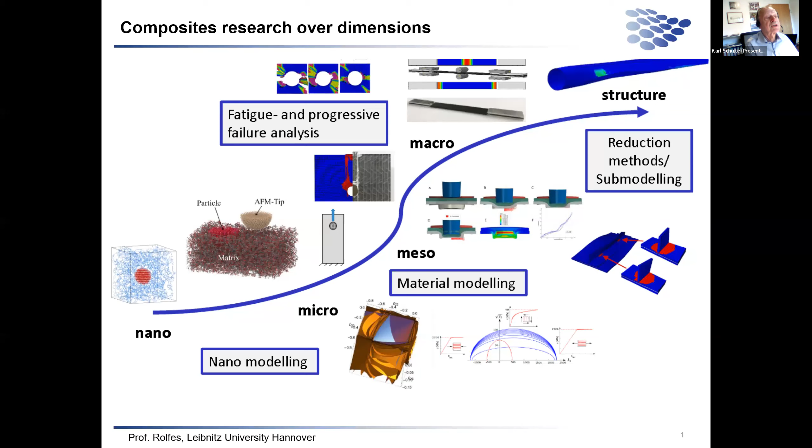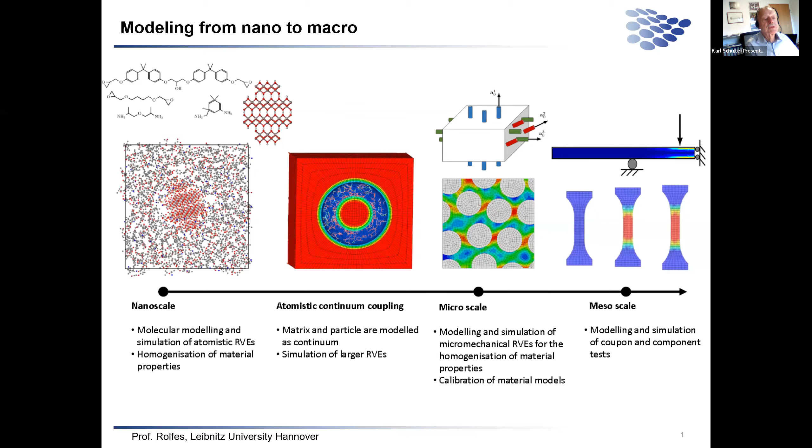So when we want to understand the material in modern design, we need to model the material. We have made quite some progress in modeling, starting from the interaction between, for instance, the nanomaterial with the matrix, shown on the left-hand side, then atomistic continuum coupling models. We go into the micro scale and mesoscale with the coupons, and further into the large structure, as you see here an example of a wind turbine blade. That means we go from the nano to the macro level for understanding and description.

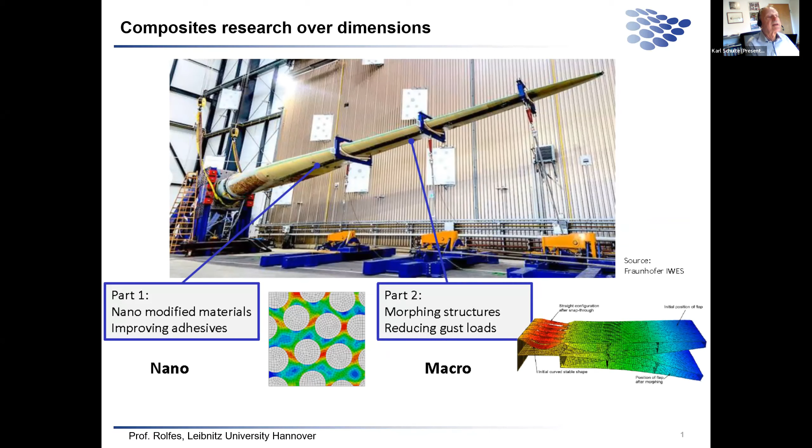Now I want to go a bit into some results of what's going on. You see here an example on the left-hand side where we see the fibers and the matrix, the gray part, and inside schematically carbon nanotubes, or for instance graphene or graphene oxide, as you can see here as well.

We have our fibers, our carbon fibers, and to understand the material properties, we need to understand the material entirely. We need to know how a carbon fiber is structured, what the properties are, the tensile and compression properties. But if we have nanofillers, we have to know also the properties of the nanofillers, and the interaction between the matrix, the polymer, and the nanofillers or the part.

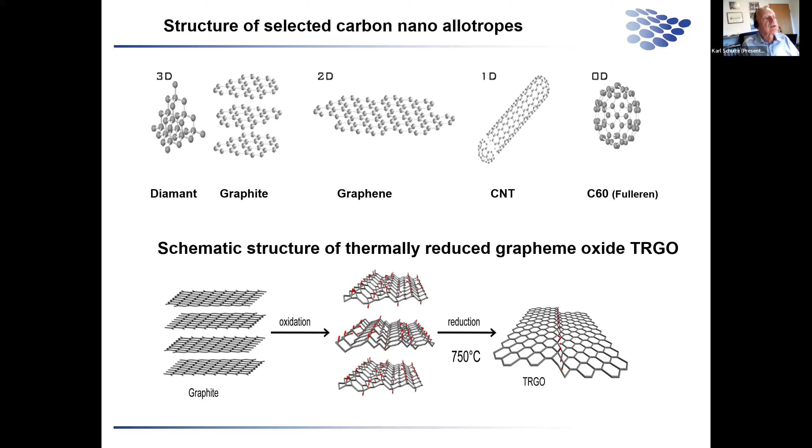So I will talk about nanofillers - I will use graphene or carbon nanotube, and to a larger extent, reduced graphene oxide, so thermally reduced graphene oxide. That is a material we can put into the matrix. I will further talk about a three-dimensionally structured graphite, which we call aerographite. This is a hierarchical carbon nanomaterial formed in a three-dimensional network, which is interconnected and extremely light in weight. If we have more time, I will talk a little more about this at the very end.

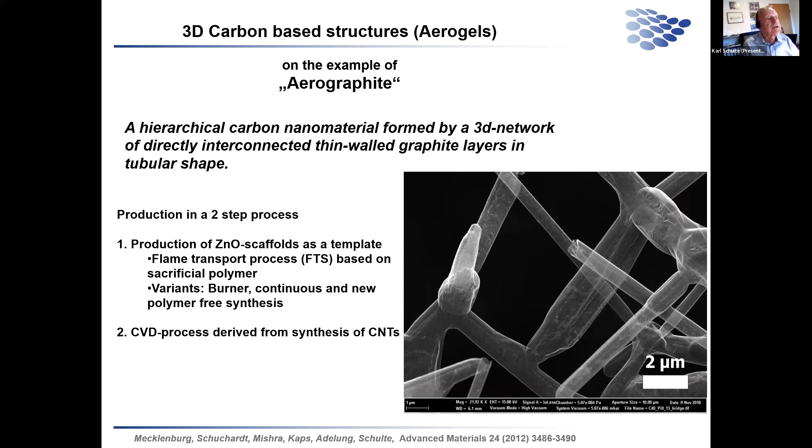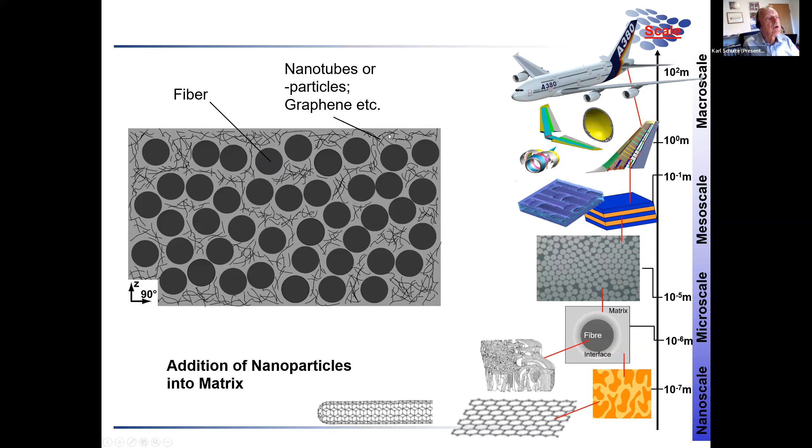Going back to carbon material, first I will talk about just the matrix filled with carbon nanotubes or graphene oxide. An important point is the damage behavior in a composite material. Fiber reinforced composites, if overloaded, might lead to matrix failure - a crack in the matrix, probably a crack between fibers. If we use carbon nanotubes as a filler in the matrix, as shown here...

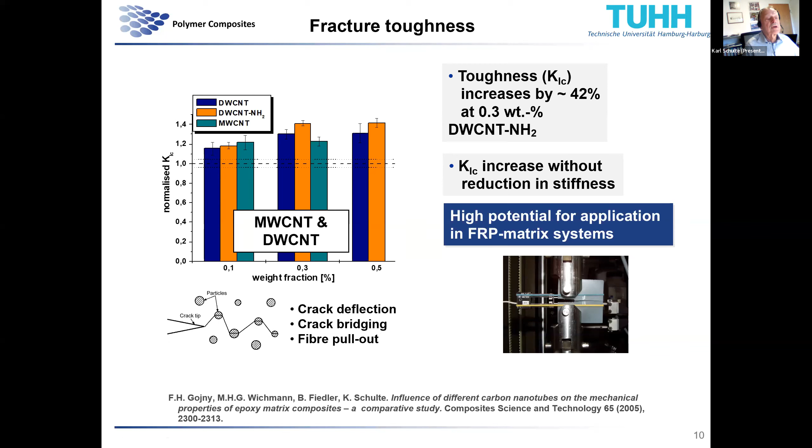We know from a test where we use a neat matrix and add only a very small amount, just 0.3%, of carbon nanotubes - there can be different types of it, I'll show that later - that we see an increase of a certain amount in the fracture toughness of the matrix. This increase in fracture toughness is due to mechanisms at the crack tip: crack deflection, crack bridging, or in the case of carbon nanotubes, pull-out of the nanofibers from the matrix. That results in this increase in fracture toughness.

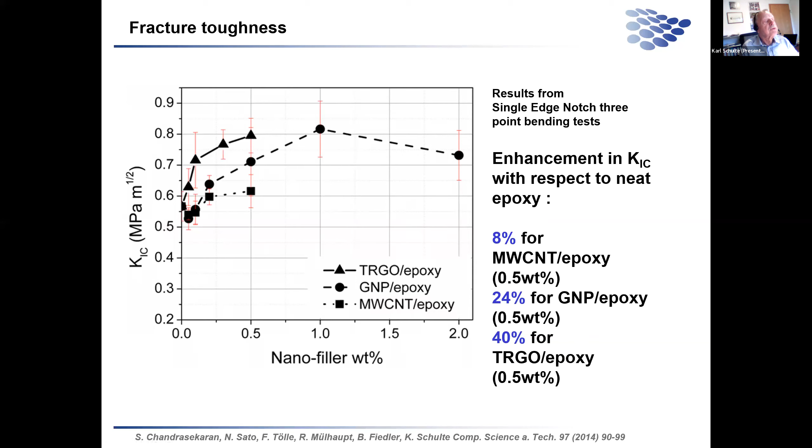With only about 0.5% of the fillers, we see an increase in the fracture toughness of up to 40%.

This increase in matrix properties should also result in improved properties in a fiber reinforced epoxy. This is again the picture we have seen, we know it well. Here we have a picture with a glass fiber and an epoxy matrix. These black things here and here show that we have carbon nanotubes in the matrix, and they are in between the fibers.

If we now make a compression after impact test with a composite material, in this case glass fiber - we have tests at other places which show similar results with carbon fibers - then you can see if we have a neat resin as the matrix, we have this amount. We have an increase in compression after impact strength of about 55% if we have carbon nanotubes in the matrix - or in this case, no, we have thermally reduced graphite oxide in the matrix. And you see, this is a tremendous increase.

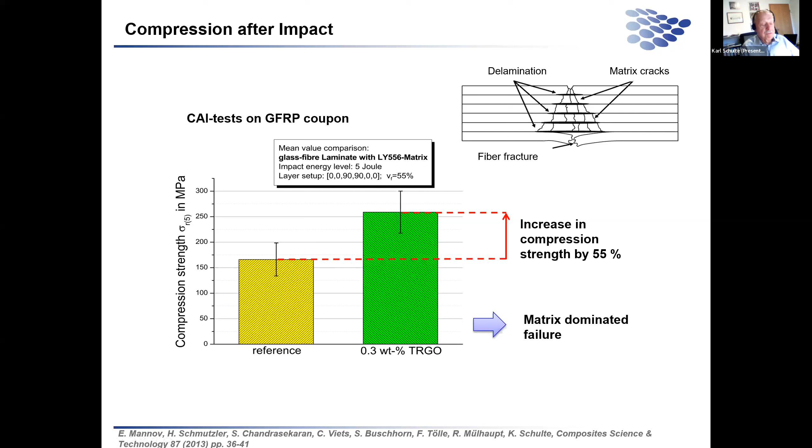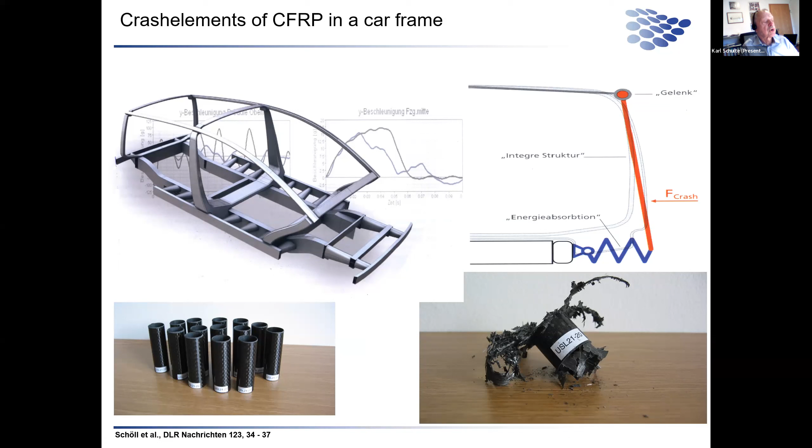This also suppresses the formation of cracks in further tests. It helps, for instance, if we have a car with crash elements in a frame, induced - you know that from race cars as well. If we have these improved materials in it, then we have a strong increase in the crash resistance of the material.

We know that composite materials can also have fatigue damage. Therefore, it's interesting to know if we also have an improvement in fatigue results if we have carbon nanomaterials in the matrix.

Here we have plotted the maximum stress in a load cycle versus the number of cycles to failure. What we can see is a test with fiber reinforced material without any nanoparticles in the matrix. If we add nanoparticles to the matrix, then we see an improvement in fatigue life.

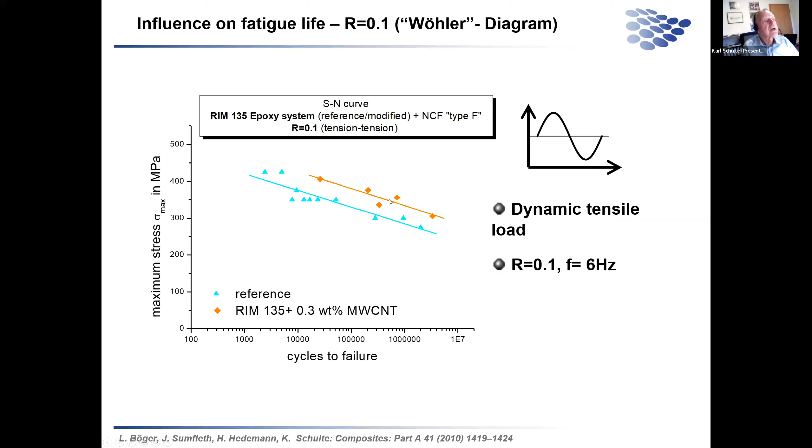We can have another view of this material, and then we can see what happens - I'll show later another figure with test results. If we have damage in a composite material, we can translate that into degradation, which we take from a reduction in stiffness. During damage development, the reduction in stiffness, or degradation, is due to the fact that we have damage and cracks, and there's a transfer of load away from the damaged area into the intact area.

That means the intact area is higher loaded. We have a higher strain there, and that means we have a reduction in stiffness - this is put together as the degradation. If we look at the degradation, it's well known that we have about 3 parts: an initial part, then for most of the fatigue life, a second part, and then a third part which leads to final failure.

If we now have modified the matrix with a nanomaterial - nanomodified - then we see a shift as well, that the degradation is delayed. With this delay in degradation, we also have an increase in fatigue life before we have final failure.

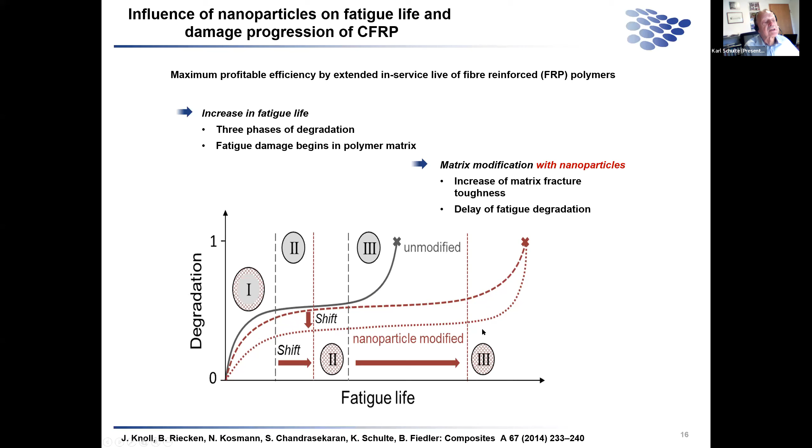We can now show this in a test with various composite materials using carbon fibers T700S - you might know this - here is an epoxy system. We have the black line, that's the unmodified matrix. The red one, we have put 0.3% of multiple wall carbon nanotubes into the matrix, and we have a few layer graphene, something like thermally reduced graphene, in the matrix. You can see when we change from unmodified to modified, we have an increase in fatigue life, and also the degradation is better - we have higher degradation here when unmodified.

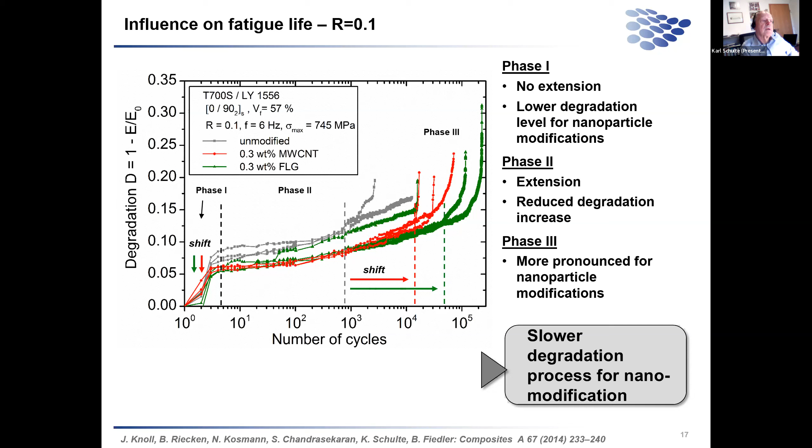We have a higher degradation here when it is unmodified. What we can even see is that moving from carbon nanotubes to graphene, we have a further increase in fatigue life. I think this is good news, and this is something that would help in the design of composite materials, for instance aircraft. Higher fatigue life means, and translates at the end, into weight saving.

So the process behind that, with this few layer graphene, is that we not only have bifurcation of a crack and of a crack tip, but with a few layer graphene, they separate - they open here and then form either what we can see here as plastic voids, or additional cracks and bifurcations.

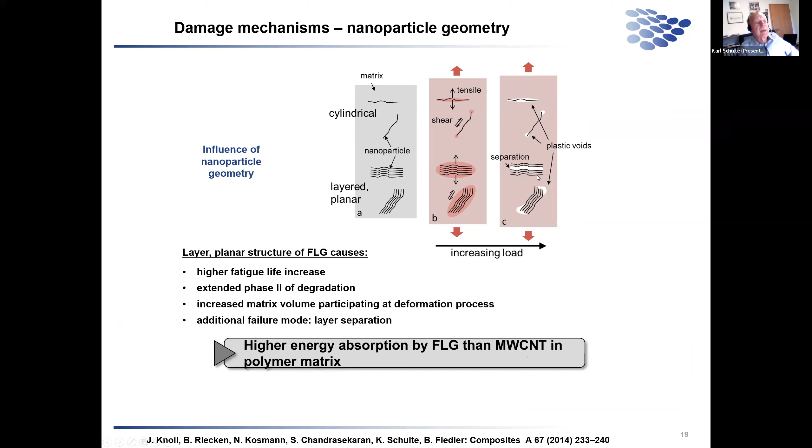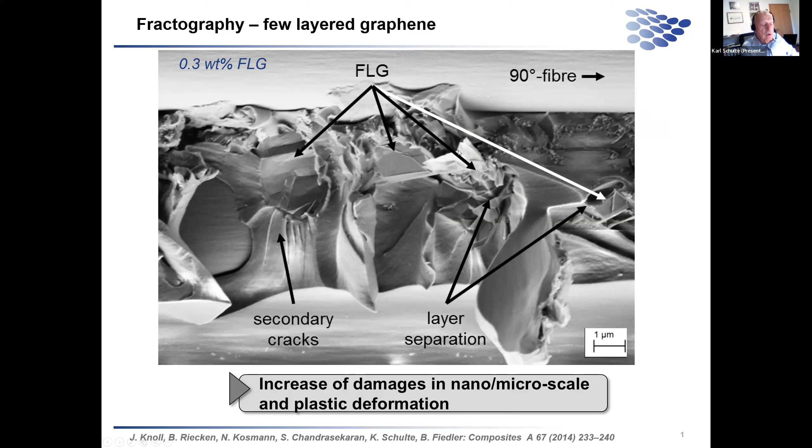So you have inside a lot of cracks. And if you have these cracks, it means at each crack you have a reduction of the stress intensity factor, and that gives you better performance in damage development. That is shown here with the fibers, and you see the few-layer graphene particles forming in between more cracks. That is the result of why we have an improvement.

If we use that for technical products, it's important not only for aircraft, but for other things too: tennis rackets, or, which is very important, a motor helmet, and something which is underestimated, bicycles and bicycle frames.

Ordinary people think that bicycle frames are stiff and strong and you can just throw them around, but that's not the case. They are composite materials, and if you have a touch against the frame, against the carbon fiber tubes, then delaminations form. You don't see that from outside.

Then you use your bicycle, maybe go onto a difficult track, and your bicycle can fall apart. So that's something to not underestimate. It's mainly important for hobby cyclists - they have quite a lot of accidents because of this. So if you have a bicycle with a carbon frame, be very careful and don't let it fall against a stone or something like that.

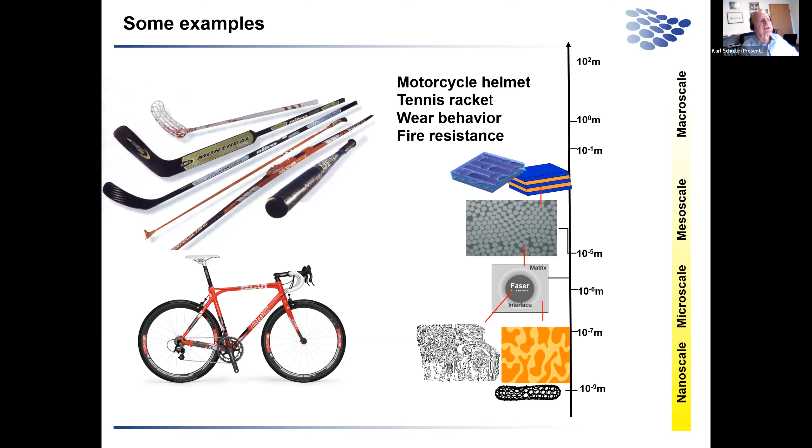But you see, fracture toughness is very important. The other thing is with motor helmets, there it's very important to have later damage resistance, a higher fracture toughness, maybe also fire resistance and other things.

Now I want to move to electrical properties in epoxy polymers and also fiber composites. Going back to the electrical properties of a neat epoxy: if I have the epoxy matrix with nanoparticles distributed in it, and we look at the electrical conductivity, we can plot the volume fraction of nanoparticle inside the matrix.

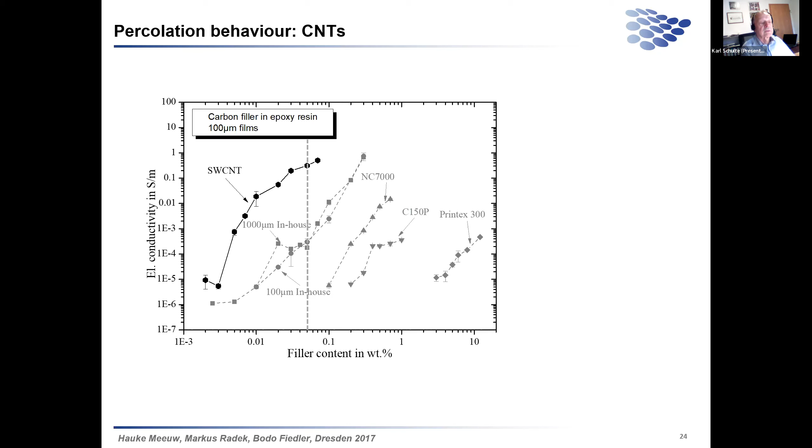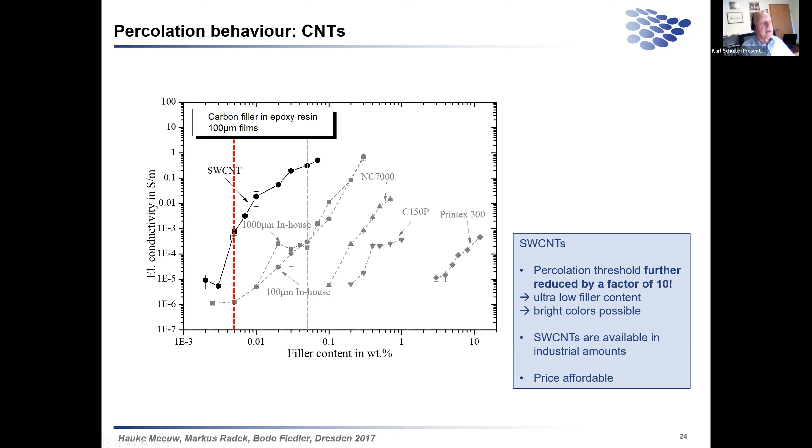We can work further on that with more modern carbon nanotubes - what we call single wall nanotubes, very thin, very high electrical conductivity. We add them to the epoxy with an extremely low filler content, in the 0.0 range, and we get a further reduction in the percolation threshold. So that's interesting - we can use this electrical conductivity of the matrix also as an advantage in composite materials. Using carbon nanotube single wall gives a further reduction by a factor of 10 from before. So that is the possibility.

Now, just a very simple application: one is a forklifter, which you find in logistics companies, moving on a floor. What happens is, because you have wheels made of polyurethane or rubber, you get static loading on the whole structure, but you have to get rid of that. That means you need conductivity between the floor, which has to be conductive, and also the wheels.

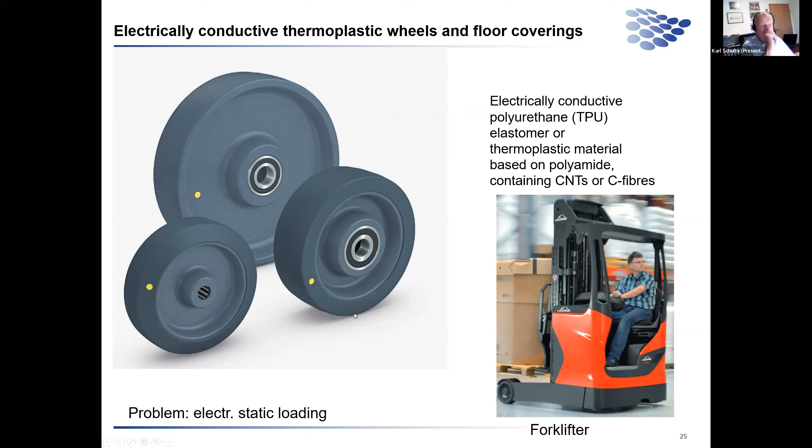So in these wheels, made of polyurethane, you add carbon nanotubes so they become electrically conductive. The floor itself has a cover, for instance of polyamide, again containing carbon nanotubes or also carbon fibers, recycled carbon fibers, and then you have conductivity and can get rid of the static charge. So that is one part of what you can show here.

Here now, more a personal thing, I want to show the electrical conductivity of this aerographite, the three-dimensional, very lightweight composite structure.

You can see here the composite material and the conductivity versus the content of aerographite inside. The red line is just the neat three-dimensional structure, no epoxy inside. With the epoxy inside, we have this black line, which means there's an increase in conductivity with increasing content of aerographite in the matrix.

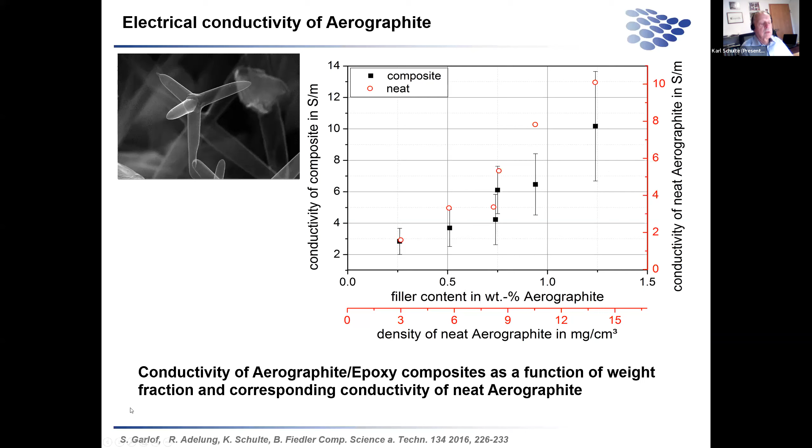What you can now do with this material is, due to the fact that it is conductive, put electric current on it. The composite nanocomposite with aerographite heats up. You have an increase in temperature, and then you can just hold the temperature, since you have an electric path, holding the current flow.

What happens is it overheats. Due to the overheating, it expands, and the contact points are interrupted. It cools down, and then you just wait. It cools down, the contacts reconnect, and it heats up again.

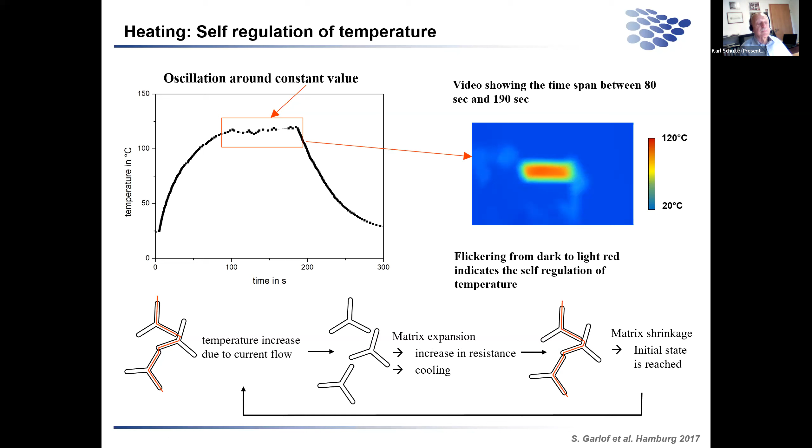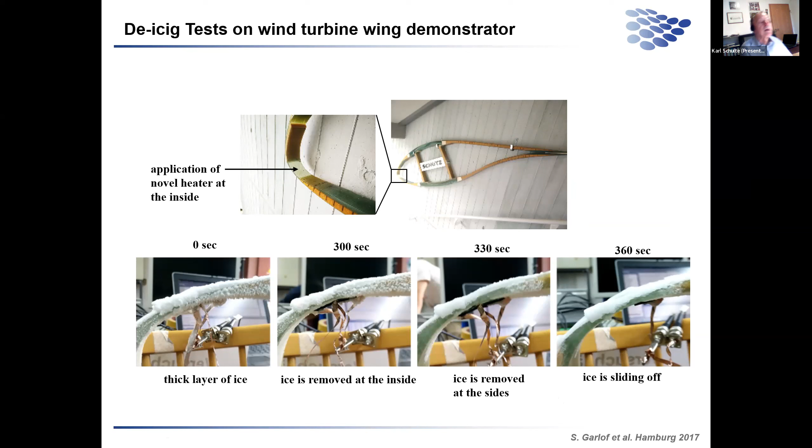This can be used as an example for a de-icing test on a wind turbine wing demonstrator. You see the demonstrator from the wind turbine blade, where we've patched the heating system on the inside, the epoxy with aerographite inside. You can see it heats up and the ice falls down and can be removed. Similar results have been done also with carbon nanotubes used for the heating system.

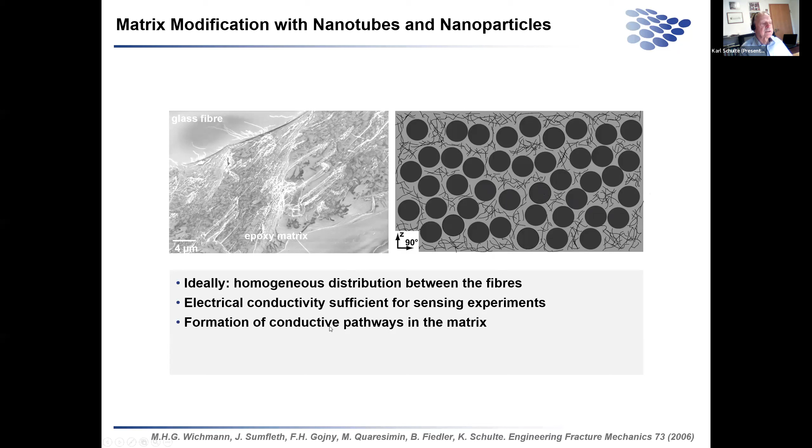As it is electrically conductive, you can also use that to sense either damage or the load on a composite material. Again here's the figure you know, with nanoparticles in the matrix. It is electrically conductive, and therefore you can use this as an advantage.

So here on a test coupon it is shown. We have a test coupon with carbon nanotubes in the matrix, in this case glass fibers, which are not conductive, but the matrix is electrically conductive due to the addition of carbon nanotubes. We then strain and load this test coupon. It elongates, as we can see. This is a stress-strain curve.

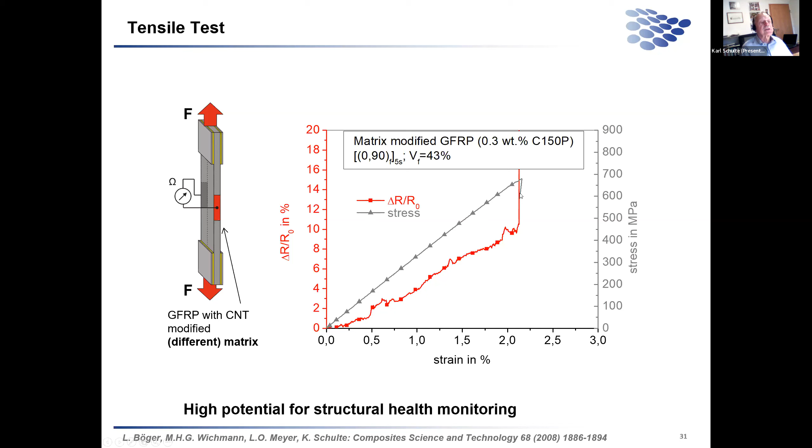If we look now at the variation in the electrical conductivity, we can see that the electrical conductivity decrease, or respectively the resistance increase, follows the stress strain curve. So you can use that, for instance, for monitoring in a static test.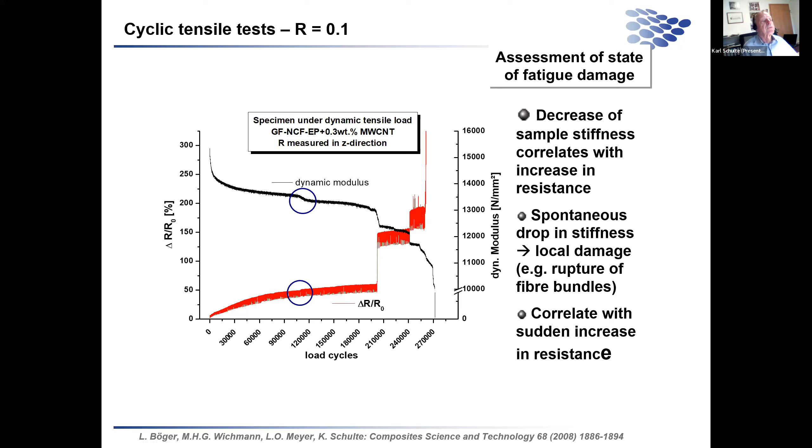You can see here, once we have a decrease in the modulus of the material, there is damage somehow, and that damage can be seen as well in the resistance change. In case there is stronger damage in the matrix, you immediately see a jump in the electrical resistivity. So the electrical current capability of the matrix can be used to sense damage, respectively strain.

Another thing one can use, going back for a moment from fiber reinforced composites to the neat matrix system with addition of carbon nanotubes, we've plotted the increase in resistivity with strain. This is the test curve, and what you can see is this line is nearly a straight line, meaning we have a very good and very high K factor over a quite wide range of strain.

If we look at what happens here schematically, when we load it, the distribution of the nanomaterial in the solid epoxy changes with the strain and deformation of the matrix. This gives us a possibility to measure an increasing resistance, partly due to the fact that these contact points are further away, which increases the resistivity.

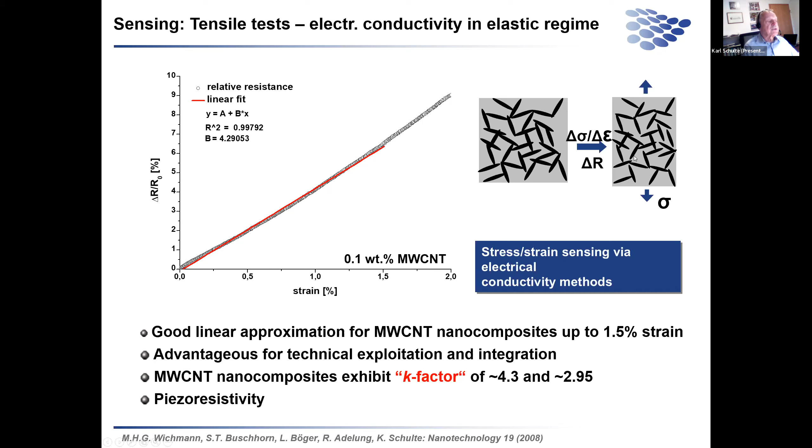So one can produce from this type of material, let's say, a strain sensing patch, and you can add something more into it so that capacitance monitoring and so on is also possible. So we can use this and add strain or stress measurement capability onto a composite part.

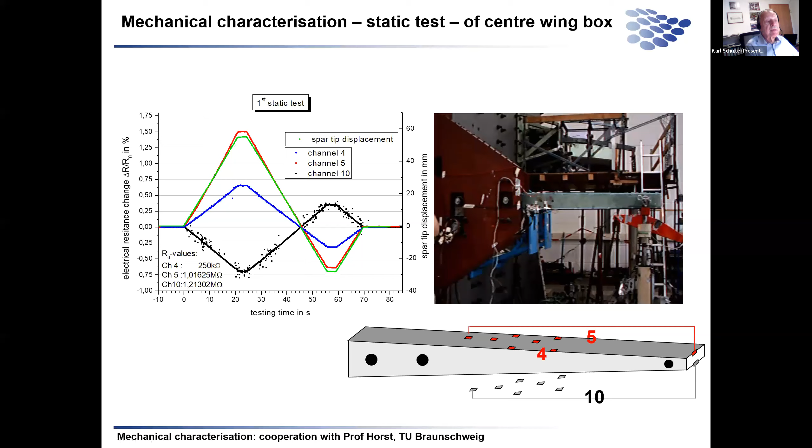Now you can see how this beam moves. So that means here you see the capability of the nanomaterial reinforcement for measuring stress or strain in a composite. This means sensing of damage and strain during operation could become possible, so that you could test, for instance, glass fiber reinforced wind turbine blades while they are in use.

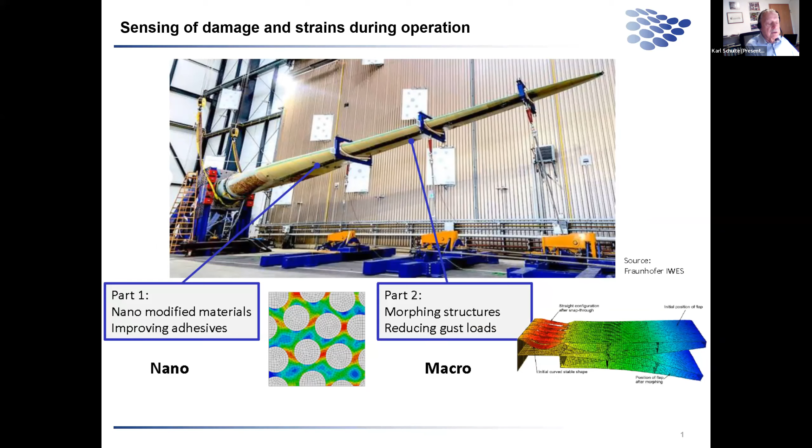Okay, this is somehow the end of my presentation. As I said, I'm from the Technical University in Hamburg, and I'm emeritus professor of the Institute of Composite Materials. My successor is Bodo Fiedler now. Most of the audience, I think, know him as well. All the work which I introduced to you was funded by the German Science Foundation, partly funded by the city of Hamburg, which is also a federal state in Germany.

It was funded by the European Commission through the graphene flagship. Okay, that brings me to the end of my talk. I'm prepared for some discussion and am waiting for questions. Thank you very much indeed.